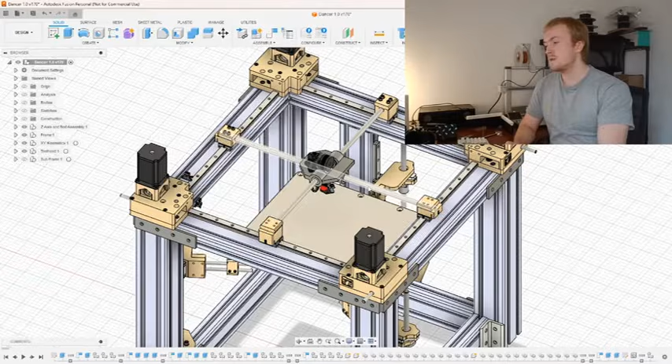Alright, hello. In this video I'm going to be talking about the current printer project that I'm working on, the progress that we've made so far, going over the CAD, just the general ideas of the project and what the next steps are before we actually get to printing.

So let's just get right into it. I think I'll talk about some of the CAD first. I'll show all the parts of the printer in the CAD so far, and then I'll actually show some footage of the physical machine I've built so far. It's not printing yet, but now that the physical machine is finished, I think at this point it's appropriate to make a video about the progress so far.

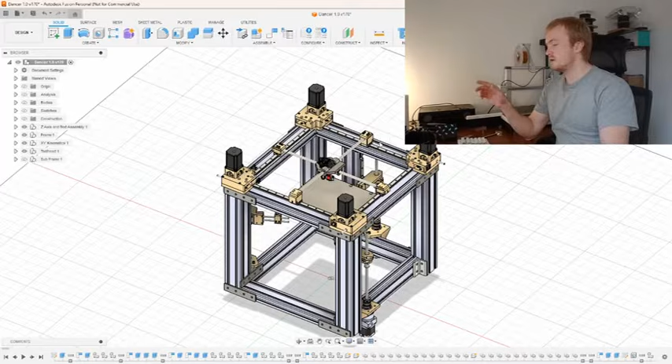So let's start with the CAD. This is what we've done so far. Currently the enclosure is muted out because it kind of obscures the view a little bit. We'll get into that later. I'm calling it the Dancer Mark 1 so far. It is a 4-wheel drive cross-gantry Cartesian printer with a triple independent Z-axis. Everything sits on a frame made of 8080 and 4080 aluminium profiles, so it's quite a lot bigger and sturdier than your standard 20mm extrusions.

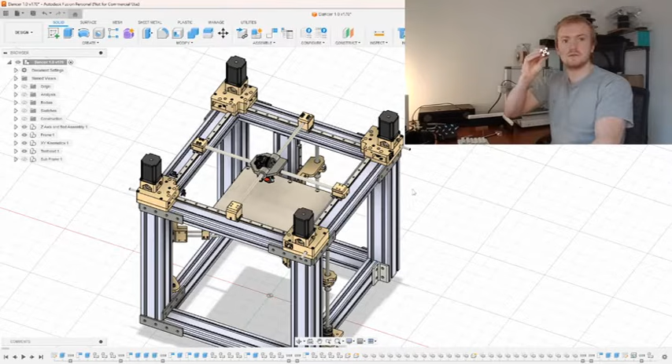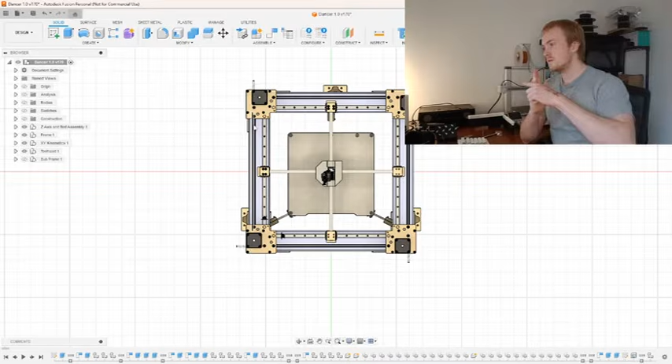If you're not familiar with this kinematic, it's something you might have seen on the Annex Engineering K3 or Ultimaker printers. These kinematics are sometimes referred to as Ultimaker style kinematics. The way it basically works is you have two linear rods crossing over each other, and as these rods move along the X and Y axes, wherever the two rods intersect is where your tool head's going to be.

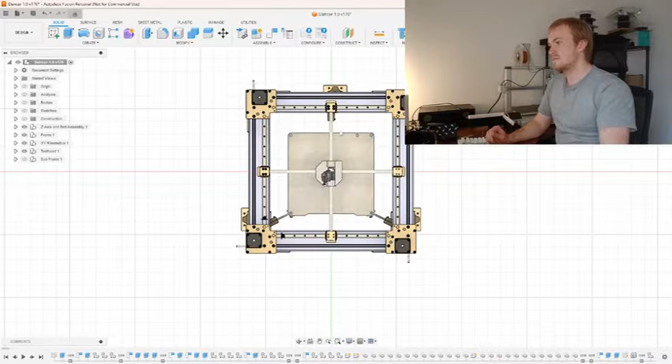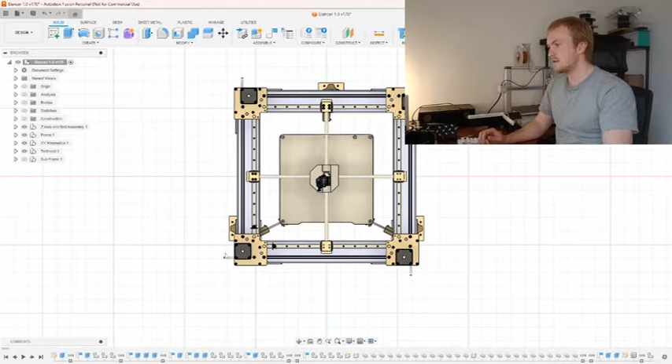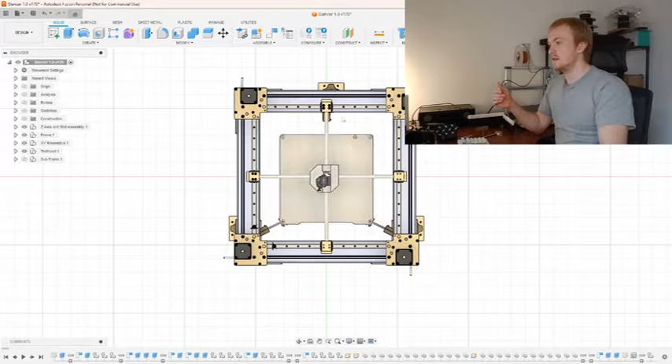Unlike CoreXY, it has full motor utilization when going diagonally. When you're moving along just one axis, it uses just 2 motors, and when you go diagonally, it uses all 4, which is the opposite of CoreXY, where with a 4-wheel drive CoreXY you'd only have 2 motors moving when the head's moving diagonally, and all 4 moving when it's moving straight. I think I've got that right.

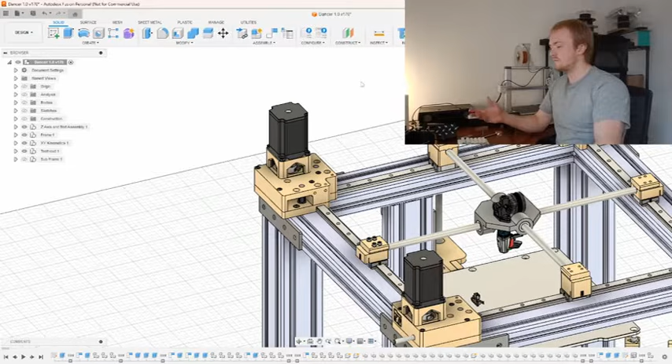So on each corner we have these motor towers with a NEMA 23 motor on top. Much like the frame and the rails, it's a little bit bigger than you'd see on most printers like Vorons, for example. Let's actually look inside one of these motor towers and get all this stuff out of the way.

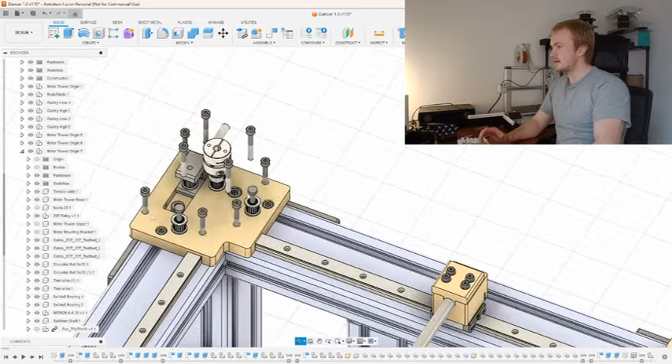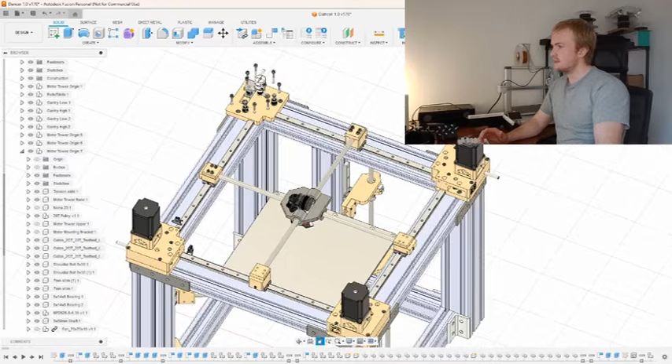If we look inside, it's actually a pretty simple construction. You have the large printed case, and inside you have 2 areas within each motor tower. You have a drive side of the tower and a tensioning side of the tower. In this case, this tower drives the x-axis, the x-axis being the linear rod that the y-axis moves along.

How it works is, if these gantries moving left and right is the x-axis, your belt loop attaches to the gantry and loops around into one motor tower, where it's driven on one side. The belt loops back around into the opposite motor tower, where it feeds into that motor tower's tensioning side. So each axis has two diagonal motor towers driving it, and the other two diagonal motor towers are tensioning that belt loop. I don't think I used the best wording, but it's pretty straightforward.

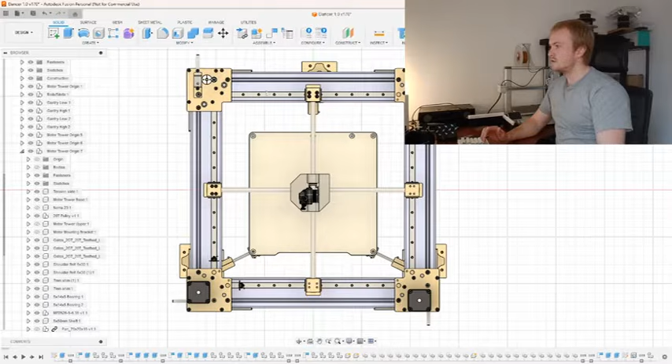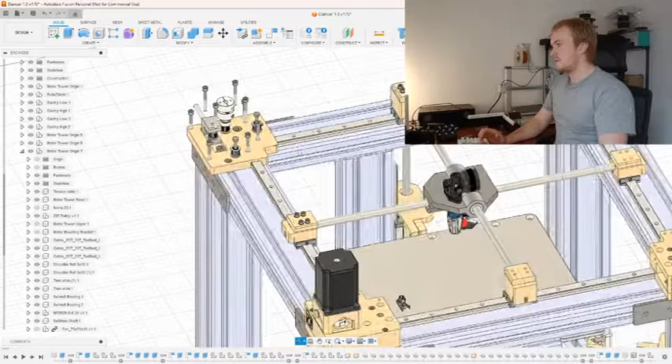You have your belt loop, which is driven on one side of one motor tower and tensioned on one side of another motor tower. All of these motor towers are identical, which makes for pretty easy construction. The towers themselves are quite easy to assemble. They really are just screws, shoulder bolts, a couple of idlers, and a pulley. And that's repeated identically 4 times.

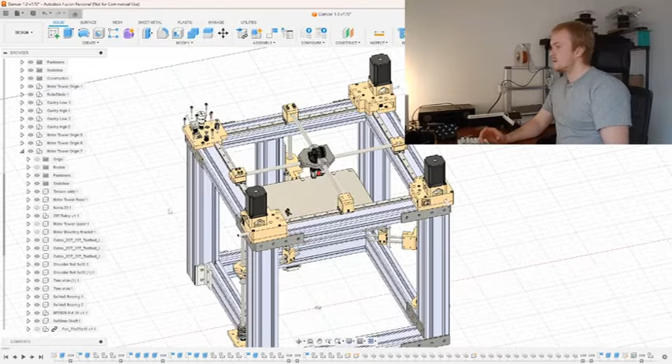So it's the same motor tower on each corner of the printer, with the towers diagonal from one another controlling one axis. These two towers, this one and this one, control the x-axis, and the other two towers control the y-axis. Let's just make that look normal again.

And then for the triple independent Z, it's again pretty straightforward. You just have a main sled attached to, again, 15mm rail. Oh, and by the way, the 15mm rails theoretically aren't the most optimal. It's not really needed to have rails this big, but anything smaller than the 15mm rail doesn't really fit on these 80mm profiles. There's just not enough flat space for the rail to sit on. 12mm rails would just be too small.

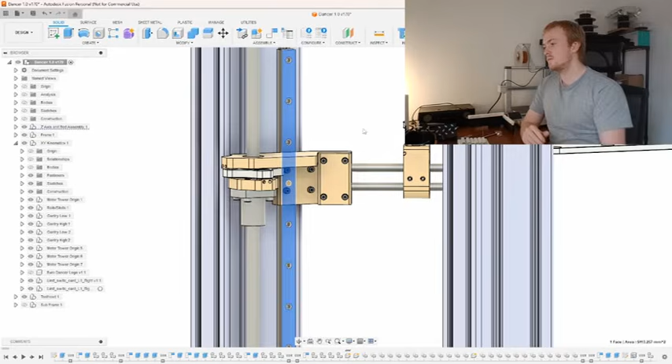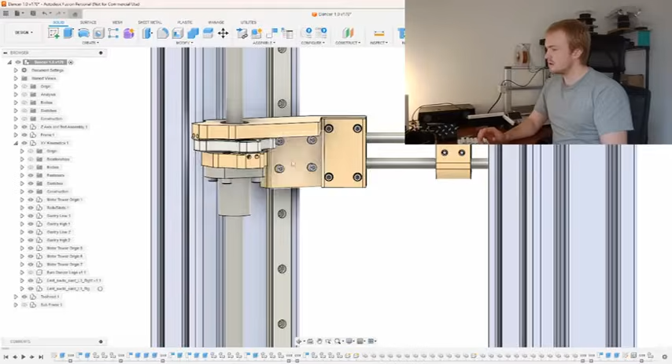It is a bit overkill with the frame, but we'll speak about that a little bit later. So for the z-axis, you just have your main sled on one side, your drive side. We have a z-wobble, like the Wobble X setup. And then on the other side, you just have two little 8mm linear rods sitting on top of each other, with a little sliding component sitting on those, which the bed actually sits inside of.

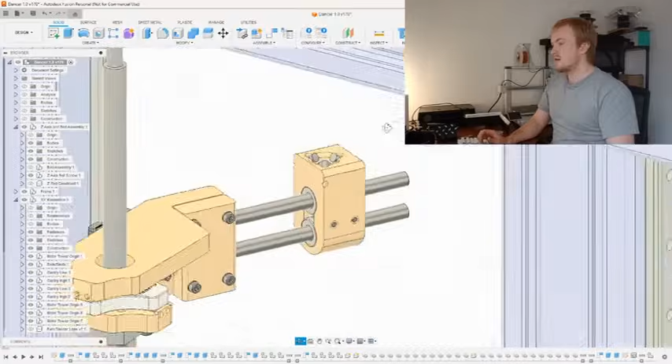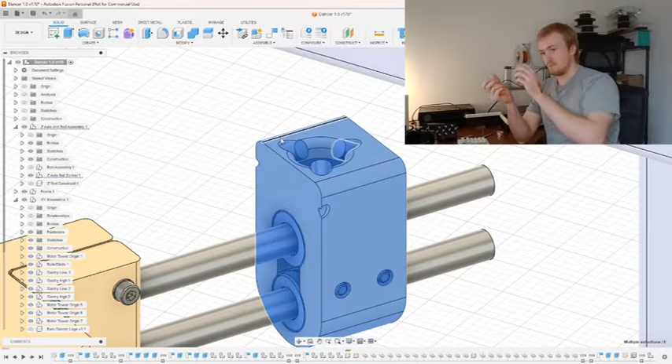So it'll be looking to here. Let's move the bed out. You'll see this little sliding component. It's just two LM8UU bearings on these little linear rods, and then this is all just printed, and it's just a magnet down here, and then you have 3 little 5mm dowel pins facing each other, which your steel ball mounted to your bed can sit in.

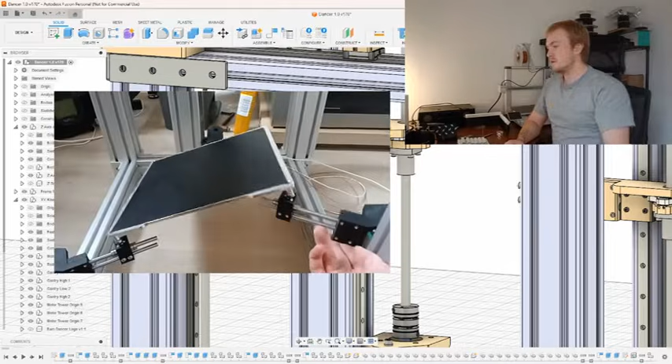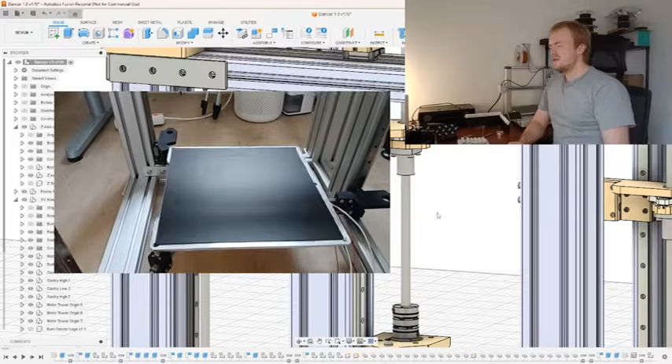And this actually allows for quite a large range of motion for the bed. It can really just go any direction you want, and I guess the longer you make these rods, the more range of motion it technically has. Obviously there's a limit to it, but theoretically this machine will be future-proof for non-planar printing, though that wasn't the intention. There's a specific reason for using this kind of weird linear rod setup that I'll speak about in just a moment.

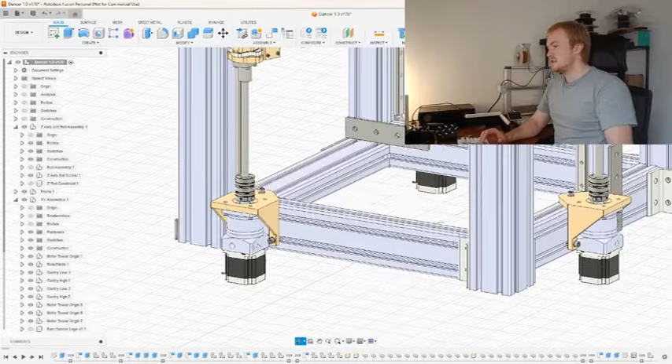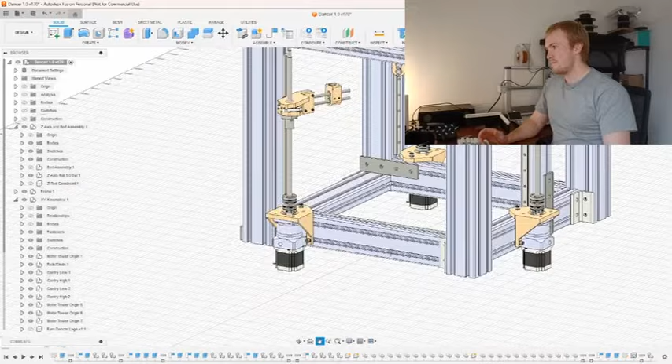In the CAD, you'll see there are planetary gearboxes on these motors. That was originally the plan, but I prefer not to have to buy a bunch of these, so I'm just going with regular NEMA 23s on the actual physical machine, because good quality gearboxes aren't cheap. Same with these. I originally planned for these to be ball screws, but again, that's quite expensive, so I just went with regular 12mm threaded rods instead.

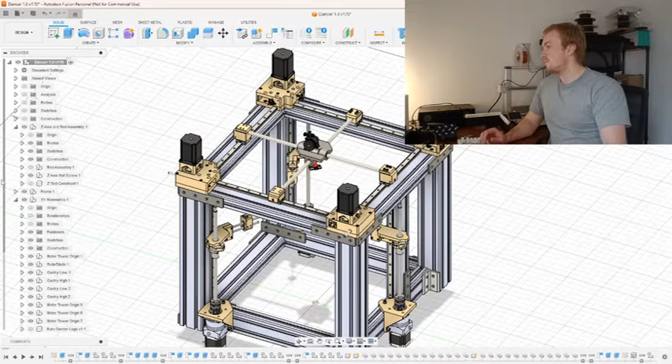So the build volume of this is around 300mm in each axis, plus minus just a little bit. That's all well and good, but the main point of this printer is this subframe here. This printer is supposed to be kind of a proof of concept for it. I struggle to find the correct terminology for this, because it's not something that exists on most consumer or hobby level printers.

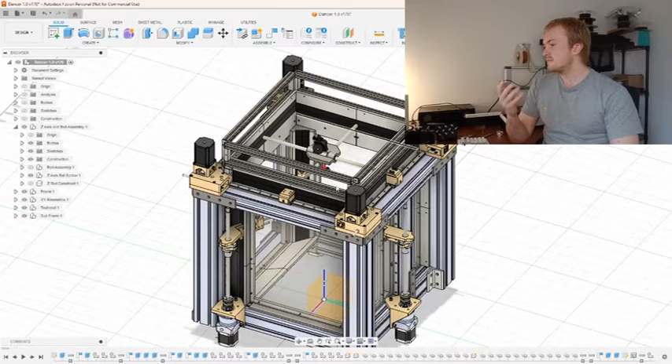It's basically having a cold outer frame and a hot inner frame or hot subframe. This is actually partially the reason why I chose these kinematics as well, basically to keep as many of the components of the printer, all of the kinematic components, all the drive components, all electronics, all the belts, outside of the warm enclosure of the printer, completely isolated, and only the components that strictly need to be inside of the enclosure are inside of it.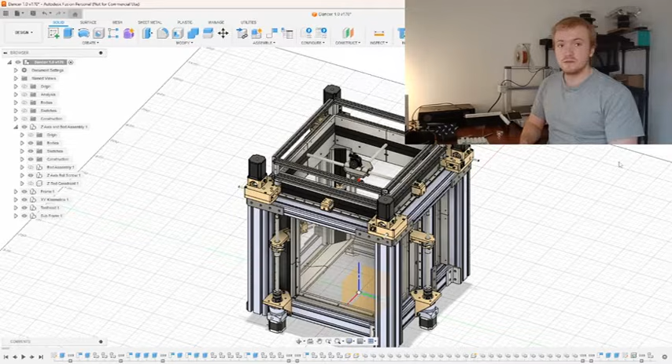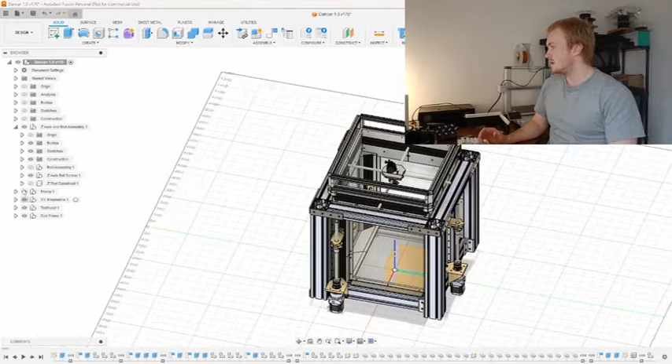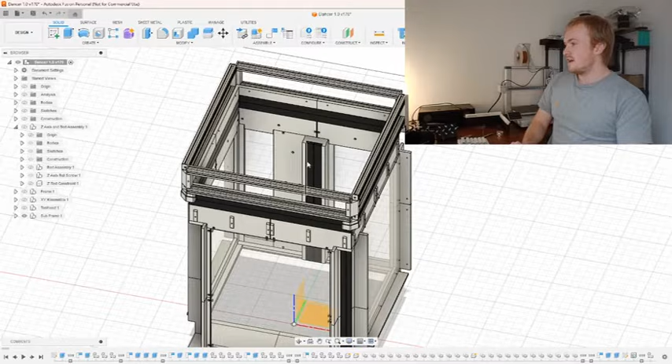So the way it works is you obviously have your main frame that everything's built onto, all of your kinematics and so on. Then you have all these printed parts. Actually, let me just isolate the subframe. There we go. So you have this subframe, which is just printed ABS parts screwed onto the inside of the frame. I'm bad at speaking. And you'll see these black things here. These are basically brush or bristle seals. I've got one of the parts right here.

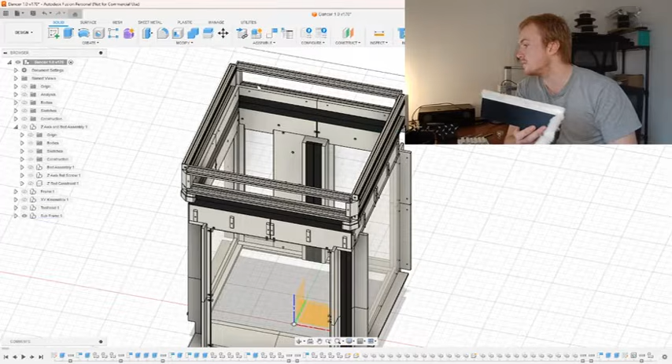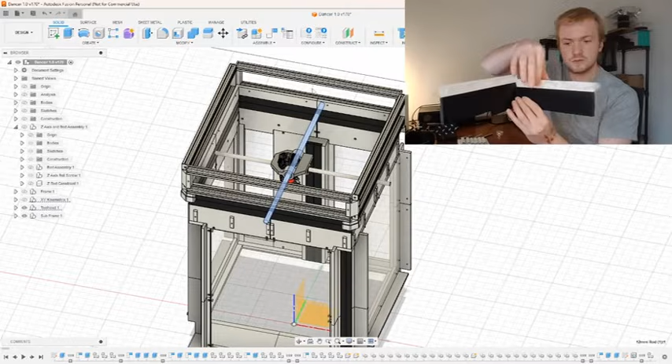So you see that here, printed, and then you screw with these holes into the frame, and whenever there's something that needs to reach into the enclosure, for example the linear rods for X and Y, they reach through 2 rows of these bristles facing one another. I only have one here, but imagine I had 2 of these on top of each other, two lines of this stuff facing one another, and this basically allows a rod or smooth object to pass through and move through it. The bristles create a seal around it.

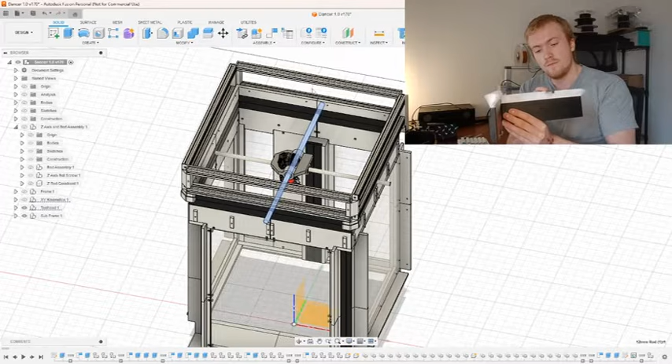Obviously not a tight seal, but enough to keep the heat in, so that you can have basically an enclosed chamber slash heated chamber, which is completely thermally isolated from the rest of the printer, including the frame, including the kinematics, just anything that would be negatively affected by excessive heat.

And so the idea behind this is that, I should say, I first started thinking about this a couple of years ago. I was doing some research on adding active heating to Vorons, RatRigs, those type of machines. And what I generally found is that it's discouraged, primarily because it's a potentially dangerous upgrade to make, adding heating elements to things. And if someone's not too experienced, that might be dangerous.

But something that did keep coming up was that the way those machines are enclosed, it's really just screwing plexiglass onto the outside of the frame, which works. You can use that, but that exposes a bunch of stuff to the warm enclosure, which theoretically is detrimental. Your timing belts, your motors, all the printed components don't necessarily work optimally at elevated temperatures. It increases wear. Everything just acts as a heat sink.

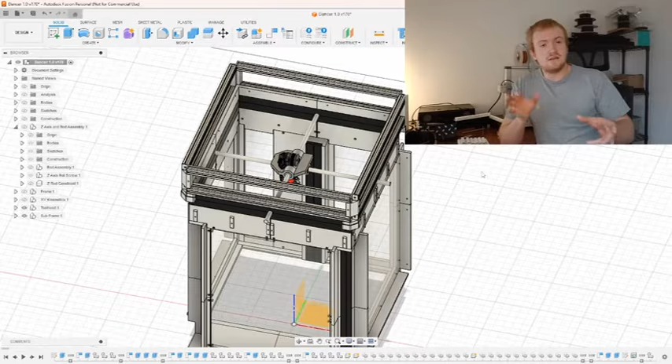And then different parts of your printer, particularly the frame and the rails, will have different coefficients of expansion, I think is the correct word. Imagine your printer's heated up to 70 degrees C. Your aluminium profiles are going to behave differently than your steel rails, than all your plastic stuff. So everything warps and behaves differently than if it was just at room temperature.

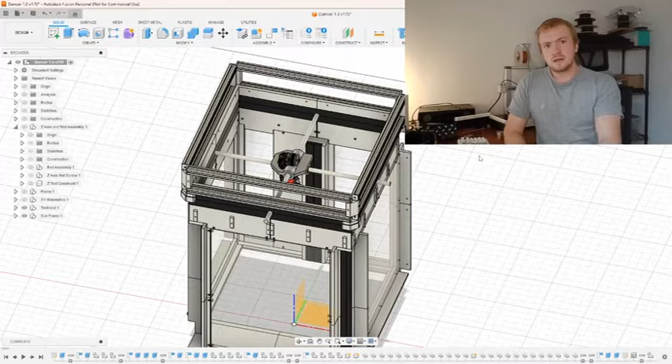So all of those things are not necessarily a completely bad thing, because realistically, that's how people have been building their printers and they work just fine. But theoretically, not having to deal with that and having all of that stuff be isolated is a benefit. So this printer and the way it's constructed is kind of a test to see how viable this kind of thing is. Is this something that is worth integrating? Can you actually see benefits?

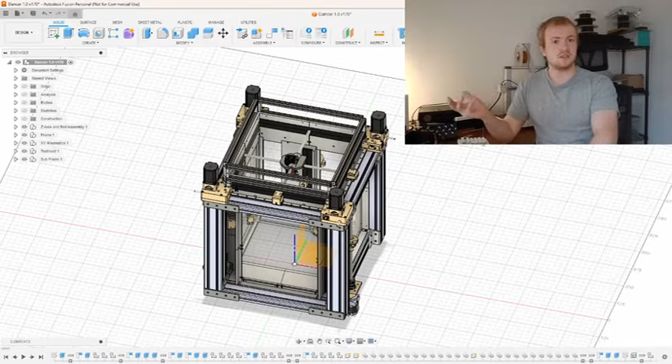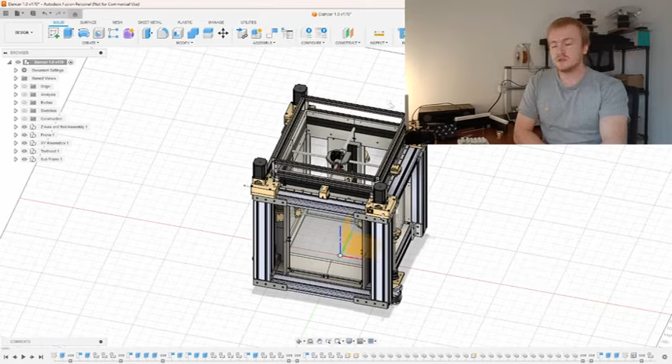Yeah, that's kind of the main reason behind it. It's definitely overkill, not strictly necessary, but I think it's an interesting idea, and I think it could prove to be effective, particularly for energy usage. There's a much smaller volume of air that has to be kept warm compared to the size of the printer.

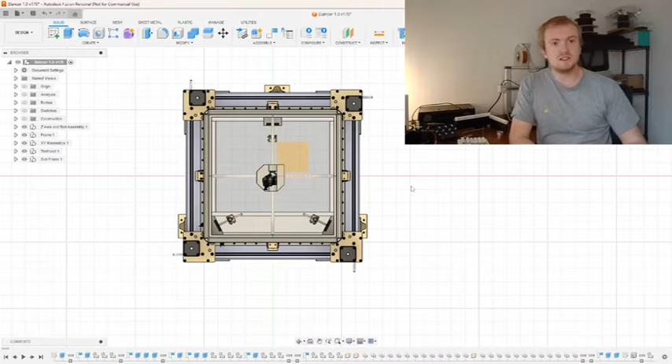Just comparing to another printer, the main printer I use at the moment is the QIDI Plus4. Whenever I preheat it with the chamber heating on, even up to an hour after I start preheating, I still hear things moving and cracking and changing. And I think that's actually why that machine in particular has had a lot of people report issues with first layer consistency and some print issues.

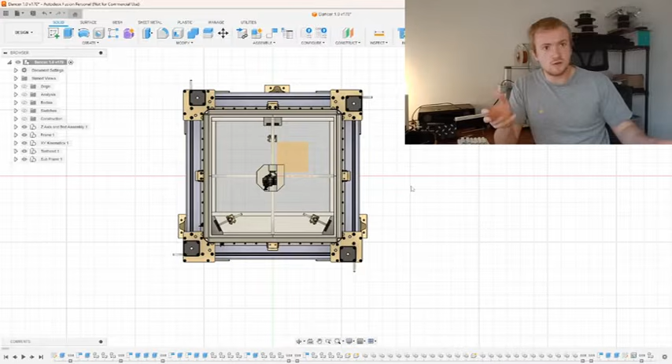I think it's because it takes a long time for a machine to heat up, and as it does that, it changes shape, it changes the way it behaves, and if it's doing that while you're printing your first layers, it's not going to print very well, and that's why you have to preheat. With a printer like this, where all the mechanical stuff that actually does the printing is not affected by temperature, I think you could see some improvements for print consistency, first layers, and stuff like that.

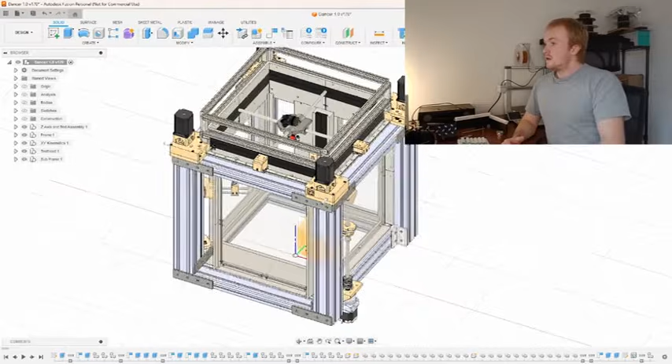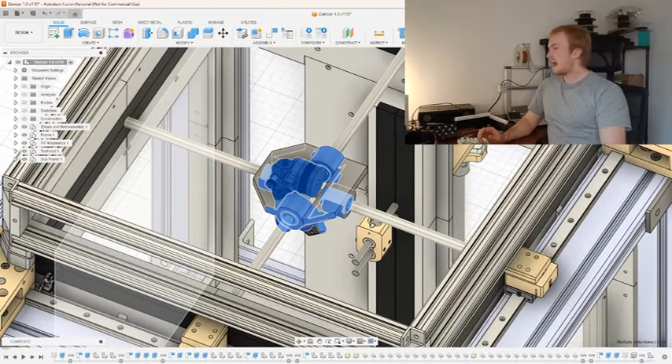I don't think there's much more I can show in the CAD. I guess I could say what's missing. At the moment, you'll see this tool head isn't complete, because it's not. I did originally have the tool head design finished. Actually, I think it's still buried in here somewhere. Yeah, old printed parts. But I decided to redo it,

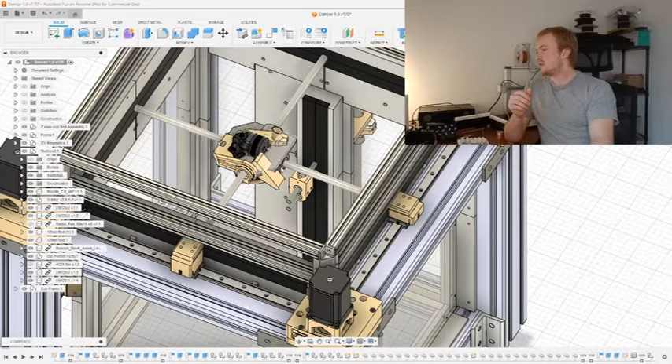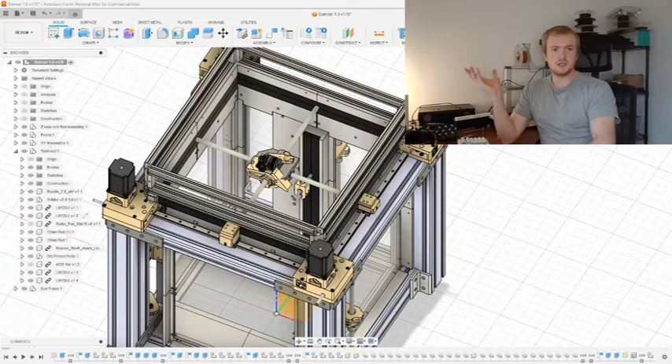because originally I wanted to use a mechanical probe for the bed, but I've recently started using a Beacon probe on a printer at work, and it turns out the Beacon is really nice to use, and a lot easier to use than I thought it was going to be. So I'm redoing a couple things mainly to use the Beacon probe, but while I'm at it, might as well tweak a couple things here and there. So there's not really much more I can show in the CAD.

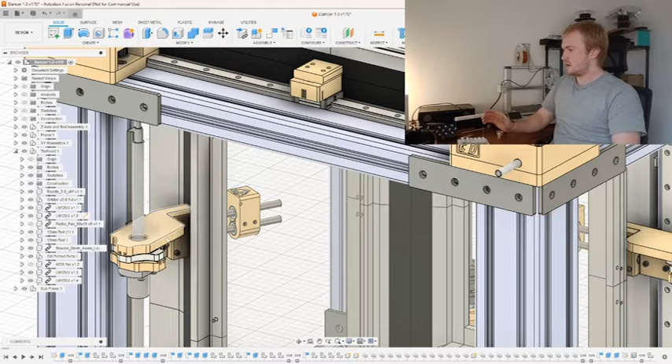Oh yeah, this is why I have these long linear rod arms on the z-axis, so that it can reach through the bristle seals, because if it was a big bulky printed part with a rail sitting on top, you wouldn't be able to create a seal around it so well with the brush seals.

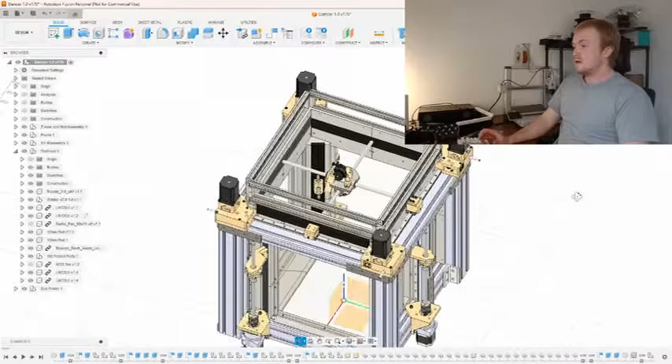Yeah, and of course that's why we went with the cross-gantry kinematics, because it's the only real way to have a kinematic where you have all your belts on the outside. Of course, if this was Core XY, your belts would be running to the tool head, so they'd be constantly exposed to warmth.

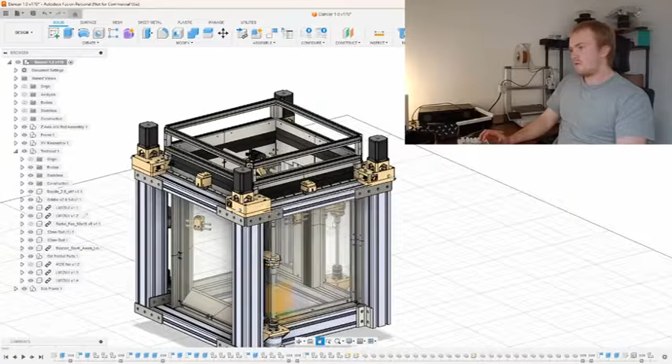Yeah, I can't really think of anything that is really worth showing at this point. So let's just move on to the physical machine. Can't see it in frame right now, but it's sitting right on the floor right next to me. So this is the machine that we've built so far.

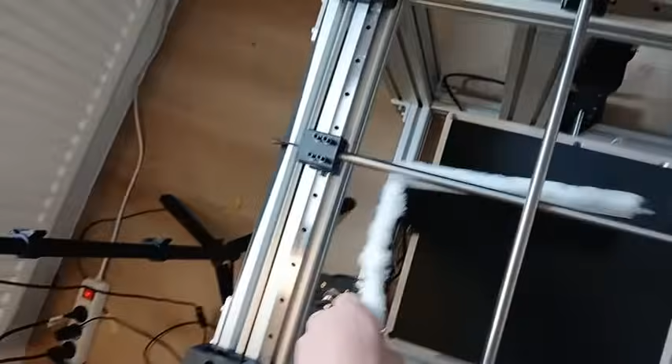So as you see, obviously the enclosure, the subframe, is not finished yet. I've only just started printing out the parts. For example, this part here will belong in this corner here. You can kind of already see how this is going to work. I only have one hand free, so I can't move the rods, but you'll see the rod sits in the brushes, it creates a kind of seal around it, and then we'll have another one coming from the top. And these can move through with actually pretty minimal resistance.

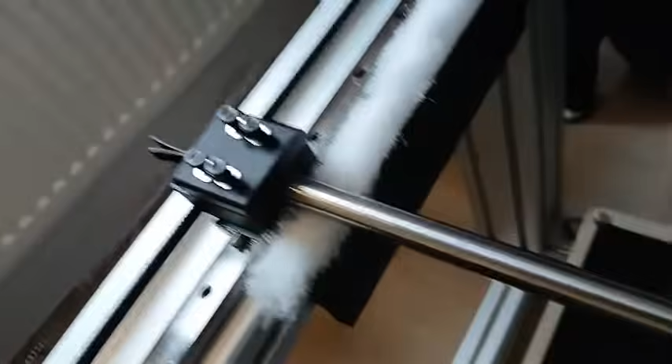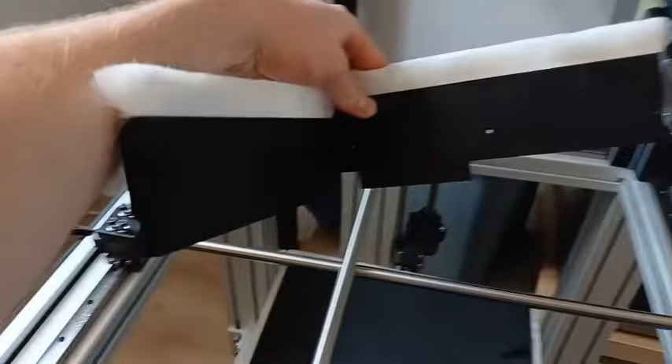I think actually, can I move it with my arm? Yeah, kind of. So you can kind of get the gist of it. That's how that's going to work. I've only printed one of these so far. I'm printing all of these out of ABS, just regular ABS. These are really bad for warping. I'm kind of causing myself some trouble trying to print these out of ABS, but I think it'll be worth it.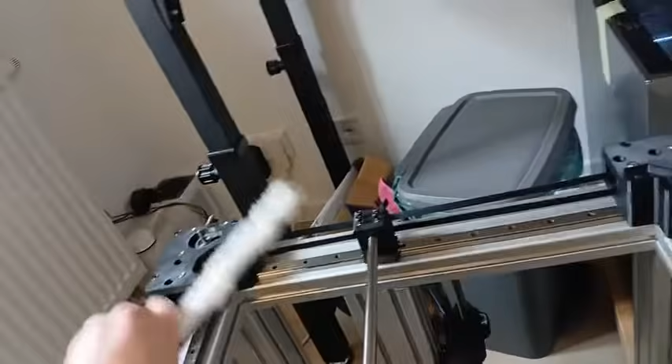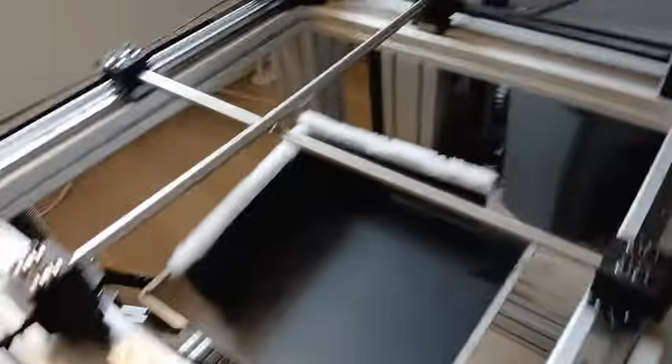And all the rest of the parts, like these motor towers, the gantry, and the Z-axis and stuff, this is all printed out of QIDI ABS glass fiber 25. It's like the glass fiber core ABS. Works fantastically, creates awesome results. They're not really coming up in the camera well, but these are really good print quality, trust me.

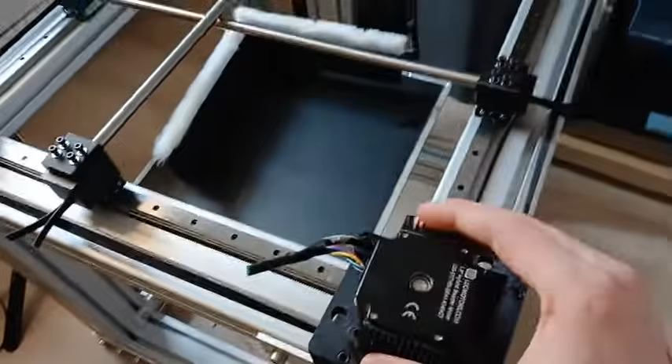So we have all the motor towers built and installed. Motors are ready to be put on, they just haven't actually attached them yet. And of course, the tool head is still missing. We still need to finish designing that and printing it. The Z-axis is basically completely installed. So obviously we have our bed here.

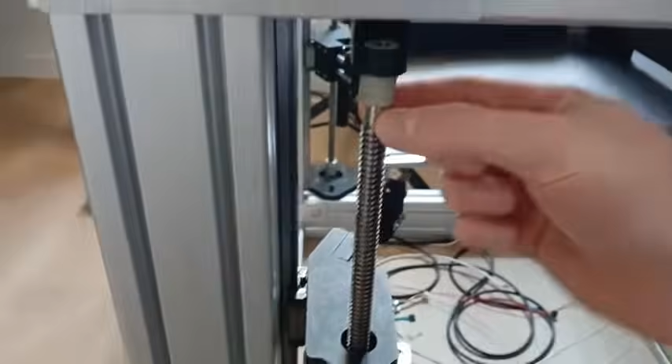So as I said, we're using just regular 12mm linear rods. I ordered these with the ends machined to an 8mm diameter. They seem pretty nice. They have a 3mm pitch, and I'm actually using a plastic nut on them. I saw that these were actually cheaper than the brass ones offered on the site that I ordered these from. And I figured it's probably convenient to not have to grease your rails as much, so we'll give them a shot. Should be good.

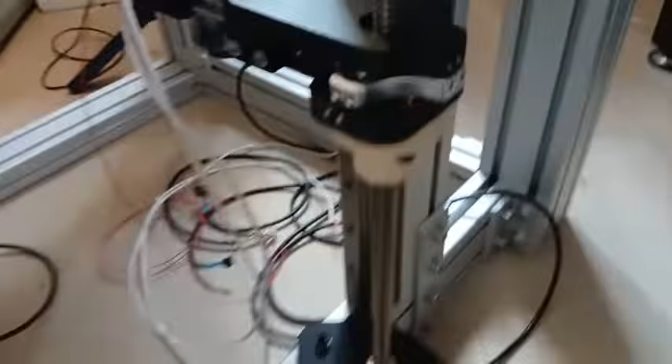Obviously you have your Z-wobble here. Actually, if I turn the printer around, we can see how it works, because I've already constrained this one at the top, so you can't really see the range of motion it provides. This whole machine's really heavy. So here I don't have this rod fixed at the top yet, so you can really see just how much freedom of motion that Wobble X allows. Obviously, it's not meant to be correcting for such big movements. Just imagine on a much smaller scale, any imperfections in the rod will be kind of dampened a little bit.

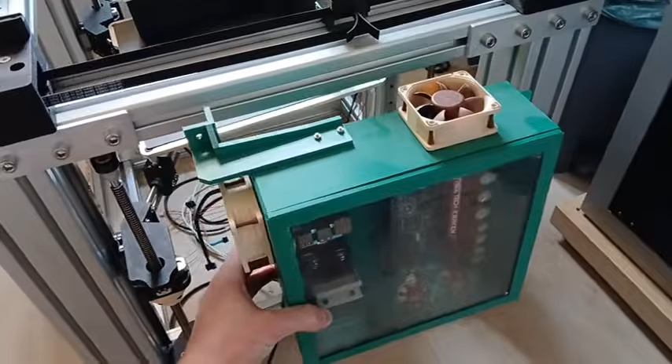Obviously electronics and everything not installed yet. This is not the electronics housing I'm going to be using on this printer. This is from an old project that didn't work. But just imagine something like this. I'll probably have like the Annex K2, is it K2 or K3? I don't really know. Kind of like have an electronics backpack on the side. I like the accessibility of that.

Also because of these frames, this printer is so heavy that having to turn around the printer or flip it up to access the electronics is just completely out of the question. So I think a side-mounted electronics backpack will be good. We'll be using the BigTreeTech Kraken and a Raspberry Pi 4. Those will be our electronics.

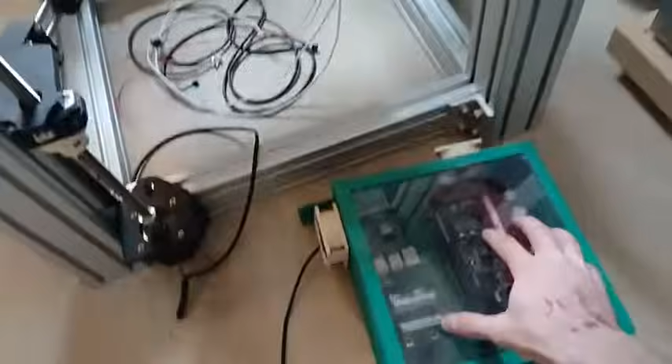I mean, that's pretty much it. I can't really think of anything else that's really relevant. This video has been an introduction to this project. As we add different parts, like the electronics, the tool head, the subframe, I think I'll make little update videos on the state of the printer. I hope that I have a bit more free time coming up in the next couple months, so hopefully I'll be able to start making some good progress on this printer. And I'll try and upload updates as they come.